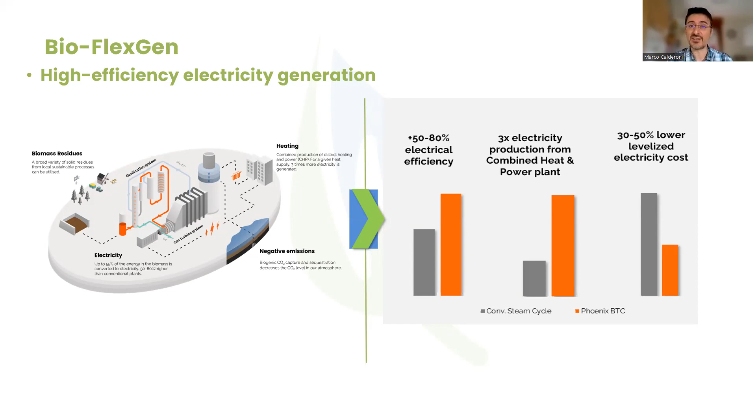Thank you, Juan. Congratulations for being short enough and precise. So the next project to be presented is HYPERGRYD. HYPERGRYD is, by the way, the project leading the organization of the workshop, whereas REWARDHeat is leading the issuing of the policy paper. So David Perez from ARC BCN in Barcelona, please, the floor is yours.

Thank you, Marco, for the introduction. I will try to be as quick as possible. My name is David Perez. I'm a senior project manager at ARC BCN, an engineering company in Barcelona, Spain. So what is HYPERGRYD? HYPERGRYD is hybrid coupled networks for thermal electric integrated smart energy districts.

What is our main goal in this project? Our main goal is to advance the state-of-the-art of district heating networks from the third generation to fourth and fifth generation district heating networks, and of course, the integration of all these networks to the rest of the energy vectors in the system. We are a project that started in October 2021 and will be finished next March.

We are around 19 partners from 7 different countries, in which we have 4 living labs - that is how we call the demos or projects. Our living labs are in Keso in Poland, in Sonnenplatz in Austria, in MB Park in Torino, and in Bolzano, Italy.

So what is a little bit about HYPERGRYD? We are developing a system that develops both hardware and software technologies in a way that we have the whole value chain of the process development of a district heating network. In this case, we study from renewable energy sources, thermal energy storage, cogeneration from other energy vectors like gas, electricity,

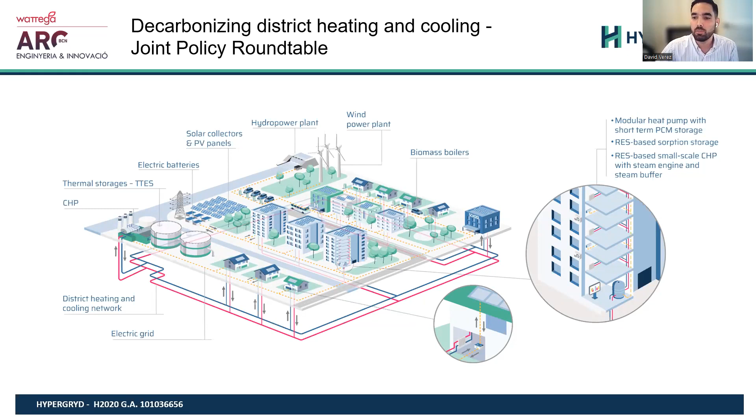or thermal. And we work with biomass boilers, with power plants, and so on. In the project, we developed 3 core technologies: one based on coupling a modular heat pump with short-term PCM storage, a thermochemical storage based on sorption technology, and a small-scale CHP for the operation of the district heating.

Software-wise, we try to cover the whole value chain of a district heating system. So we go from tools for designing the district itself to simulation and operation through a digital twin of the district heating, in a way that we can optimize the operational parameters from a techno-economic point of view. In short, this is the idea of the HYPERGRYD project.

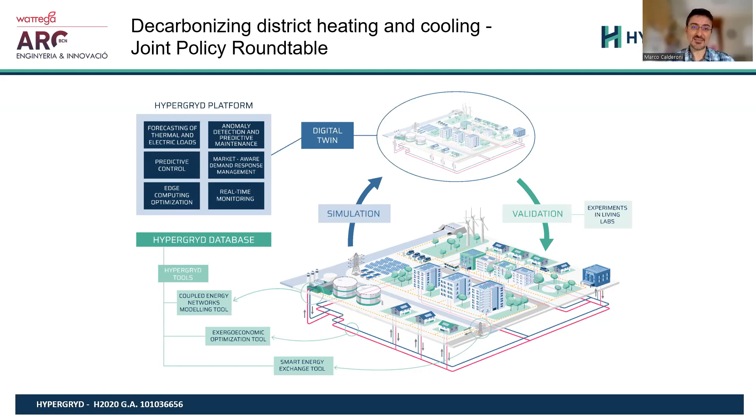So just quickly about the challenge. As you know, 50% of the energy demand in the European Union is for heating and cooling, and around 70% of the European population lives in cities. However, these cities are still energy inefficient, and there's a lot of waste heat being rejected into the atmosphere, which could cover quite a big chunk of this energy demand in Europe. This is where REWARDHeat comes into the game.

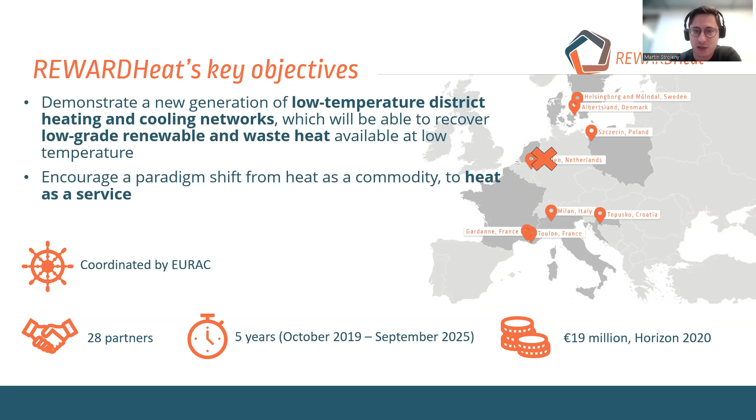Basically, what we try to do in REWARDHeat is to demonstrate a new generation of low temperature district heating and cooling networks, which can recover the waste heat available in urban areas. We also try to encourage a shift from heat as a commodity to heat as a service. We have 8 different demo sites spread around Europe.

Now just quickly about the main results of the project. First, we will demonstrate cost-effective solutions for district heating systems which can cover their demand using waste heat and renewable sources. We are also looking into assessment and characterization methods for waste heat and renewables at urban level, integrating successfully multiple urban excess heat and renewable heat sources. We also develop innovative technologies, including heat pumps, excess heat recovery technologies, and thermal storage in the networks.

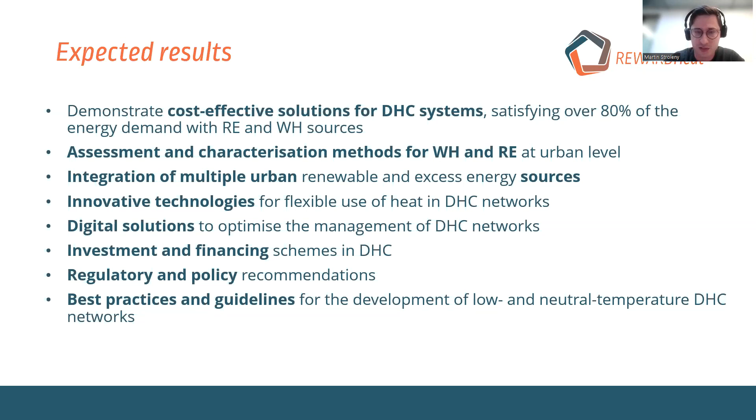We are also looking into digital solutions to optimize the management of these networks. On the softer side, we are investigating new financing and investment schemes in district heating and cooling, and finally working on regulation and policy recommendations, which is also the objective of this webinar. That would be all from my side.

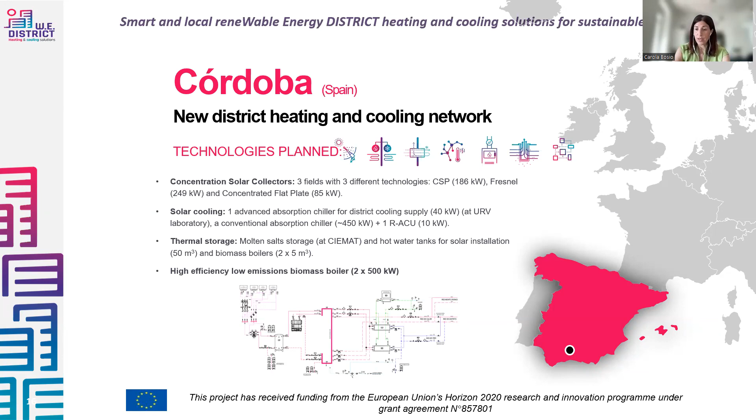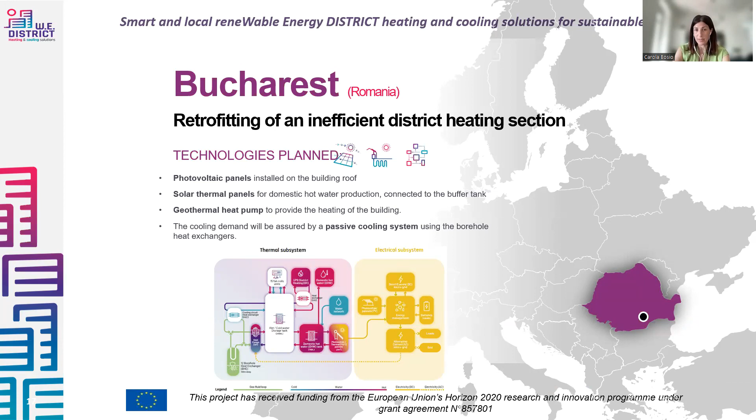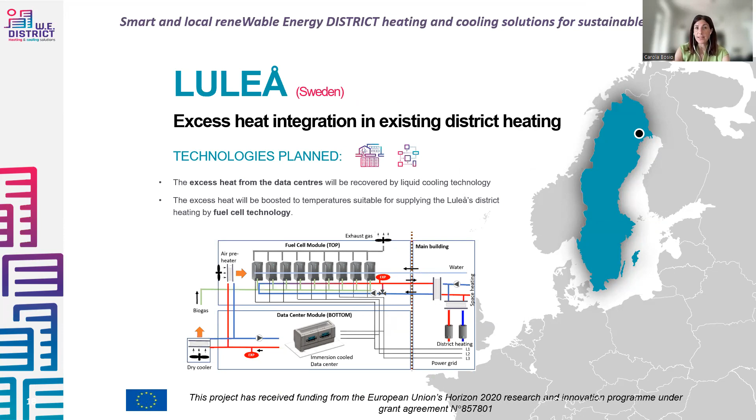The third demo site was in Luleå, Sweden, where the concept focuses on the recovery of waste heat from existing data centers at the university. The very innovative factor in this demo site is the use of fuel cell technologies fed by biogas. The last result of WEDISTRICT, which will remain available on our website, is a tool.

It's a platform where every kind of user can simulate the integration of different renewable energy technologies to feed district heating and cooling networks. The platform gives as an output a set of performance indicators to demonstrate the running of the system you configured. Thanks a lot for the attention.

Thank you, Carola. I think REWARDHeat and WEDISTRICT are about to close right after summer, so those are the two projects with more mature results.

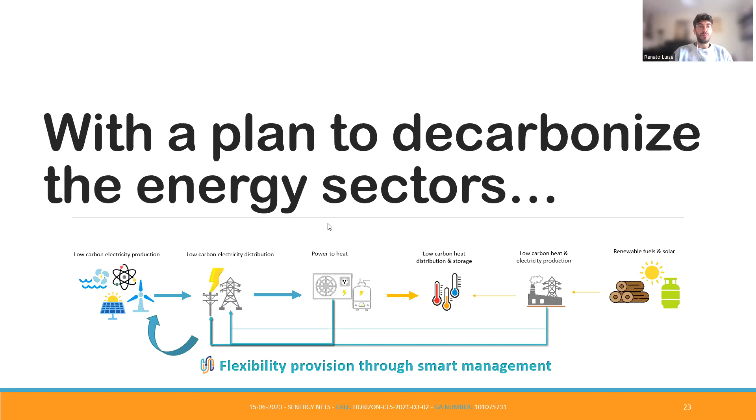Of course there are different ways, but the two main pillars we are focusing on are: first, to enhance the amount of renewable energy sources we use for satisfying heat demand through district heating and cooling distribution. Second, thanks to enhanced flexibility, to increase the energy efficiency of the system through this modeling, and also thanks to newer technologies, to decrease the energy demand.

As you can see in the consortium, we are 19 partners spread across around 8 European countries, which gives us a good overlook of different policies and frameworks, and through modeling it is possible to model different situations with different inputs. Another added value of this project is the presence of 2 DSOs in the consortium: Elektro Ljubljana and Unareti in Italy. On top of that, we have Enedis, a French DSO, in our advisory board.

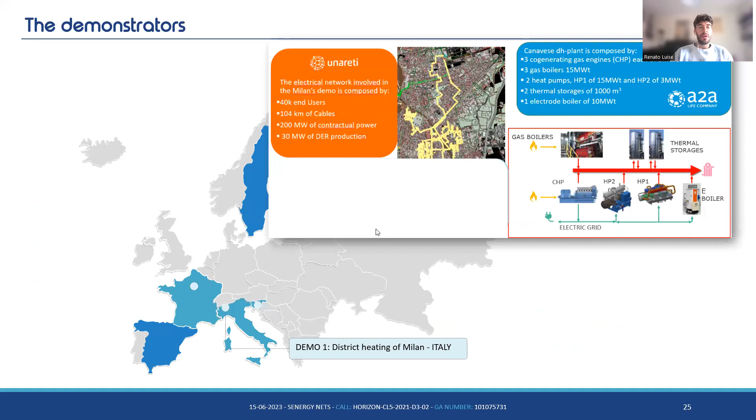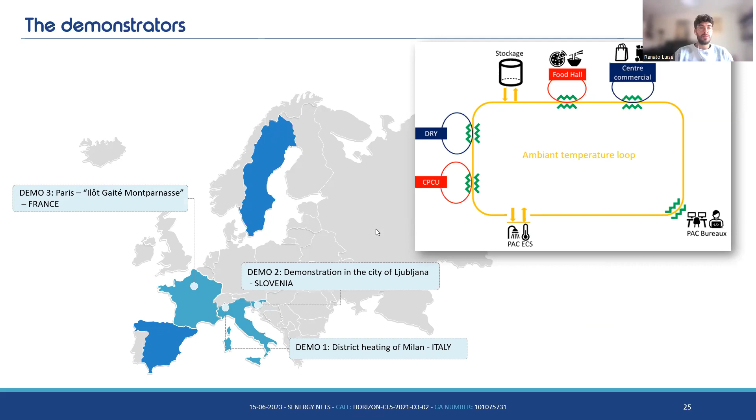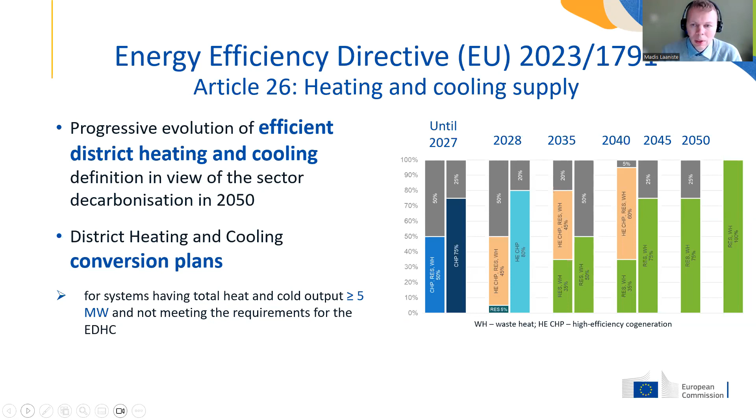When it comes to the Renewable Energy Directive, there is an overall target adopted for the district heating and cooling sector that has an indicative nature on how the role of renewable energy should increase in district heating and cooling. This is something for member states to consider in developing this particular area.

And there is also a requirement for mandatory cooperation between district heating and cooling system operators and electricity distribution system operators to ensure that the flexibility potential of district heating and cooling systems is used for balancing the electricity market and using excess intermittent renewables in heat generation in the future.

So there should be more analysis made in this area by member states and market operators to ensure that we are maximizing the output of renewables in the energy markets, and that there's good system integration in place.

There are also requirements on mandatory information disclosure by district heating and cooling systems contained in the Renewable Energy Directive, and also requirements on how to ensure that the potential of waste heat and cold is maximized in district heating and cooling systems.

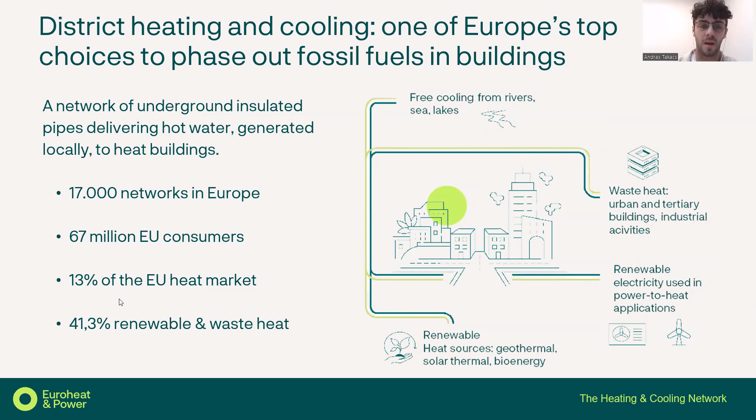Just to present you the current situation with district heating: in the district heating sector, we have 17,000 networks in Europe, which is a large number, serving 67 million EU consumers. And this covers 13% of the EU's heat market.

Recently, we published a study which mapped all the potential heat potential the district heating sector could use, and it proved that district heating could serve all the heat demand of Europe.

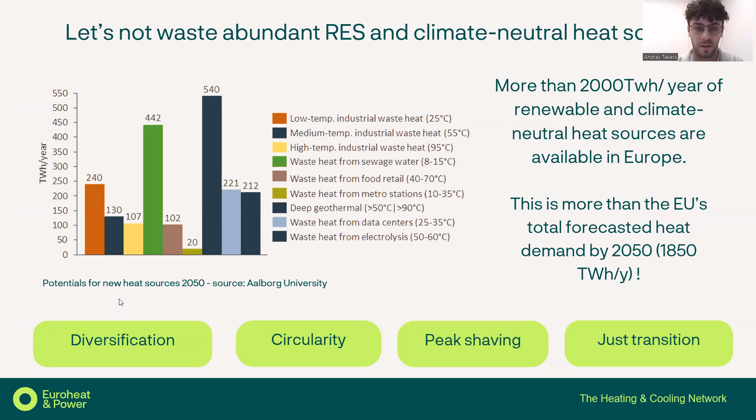You can see in this chart that the biggest potential lies in deep geothermal, but also in sewage water. And for example, from data centers as well, there's a huge potential.

We will need all of these energy sources because, according to our projections, the district heating sector will increase in the share of the heat market. By 2030, it could cover 20% of the European heat market. And by 2050, we foresee nearly half of the share.

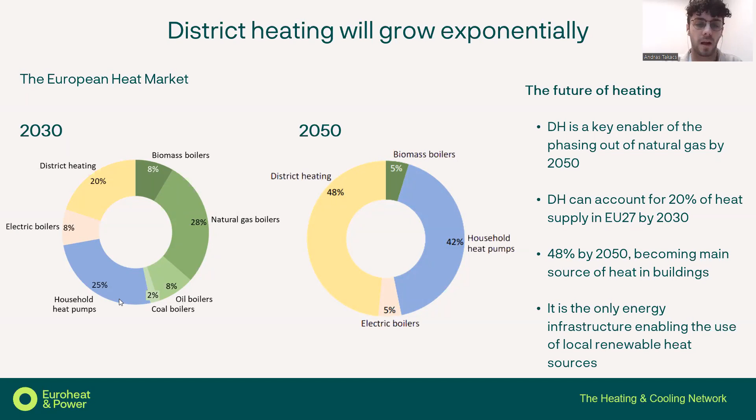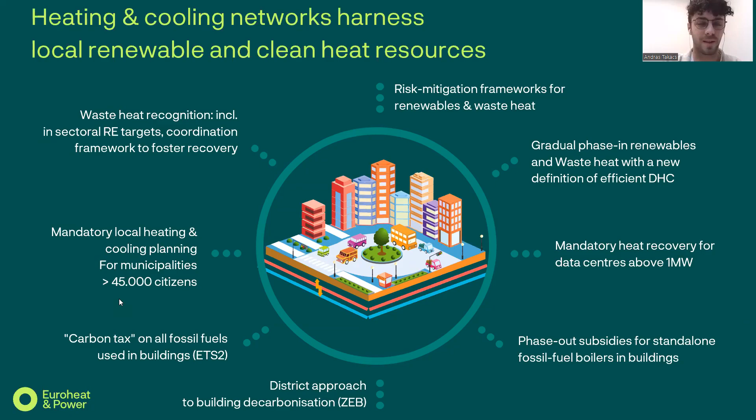Going to the policy part, I will try not to duplicate what Madis already covered, but I would like to highlight the importance of the local heating and cooling plans as well, because we see that this will be a huge push for our sector to develop further new networks.

As described, it will have to be developed by municipalities with at least 45,000 citizens, and it will map where is the potential for heat, what could be used locally, and where is the demand, and how this could be interconnected.

It's very promising, and as we saw on the map from Madis, Denmark and the Netherlands are doing already very well on national legislation on the local heating and cooling plans, but we have very good examples from Germany as well.

Where the draft local heating and cooling plan presents that the current heat market will shift from 62% natural gas and 27% district heating and some leftovers, to 56% district heating and 34% heat pumps. So that's a huge shift.

This is led by new legislation in Germany, which requires by mid-2028 that all of Germany's 11,000 municipalities make a heat plan above 10,000 inhabitants. So that's a much lower threshold than what the European Union set in the Energy Efficiency Directive.

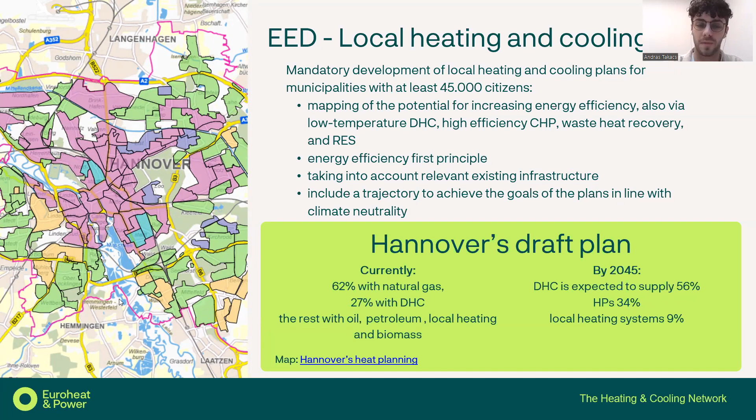We also see a very big advantage in Germany: the federal government decided to support the planning cost of the heat plans up to 2028 by 500 million euros. So the development of the plans will be also supported.

Then in the Energy Efficiency Directive, we see that many waste heat sources are supported to be used. For example, waste heat from data centers will have to be used if the data center exceeds the energy input of 1 megawatt.

And they have to make a technical assessment, economical assessment, if it's feasible or not. So that's already very positive, as we saw in our studies that the data center is a big potential for our sector to provide heat.

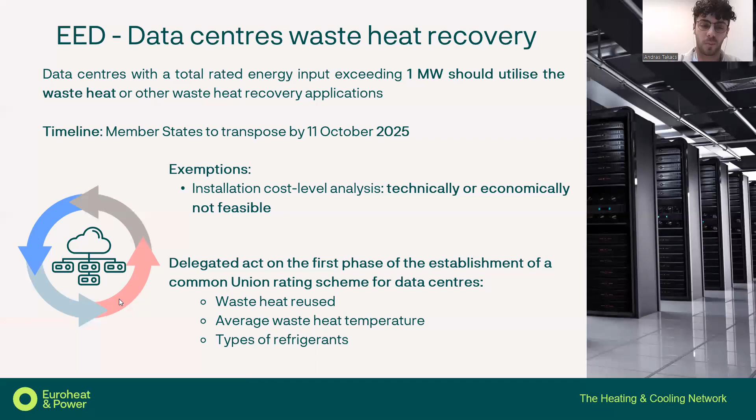And also other waste heat sources will be looked into. For example, thermal electricity generation installations - we will analyze also if their heat could be used.

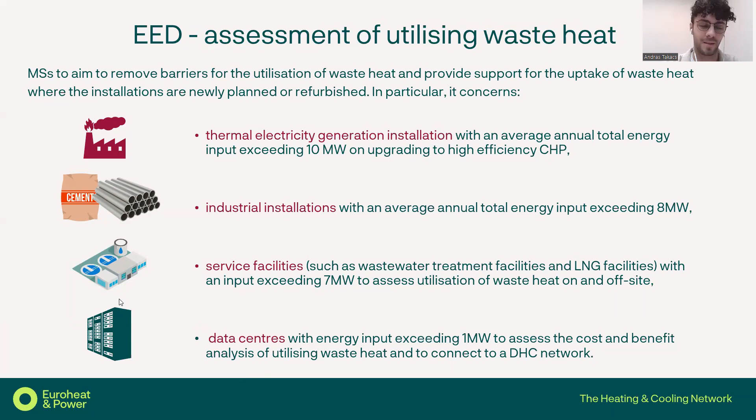Industrial installations exceeding a certain number of energy inputs, also service facilities like wastewater treatment plants, which I already mentioned, and the data centers as well. So in all of these different sectors, the waste heat potential will be looked into and mapped, to see how it could be harnessed and increase energy efficiency.

And talking about waste heat so much, we see that the RED Renewable Energy Directive also recognizes waste heat and counts it towards renewable energy targets in all of the targets, also for district heating and cooling, as was mentioned by Madis.

Then we have the efficient district heating and cooling definition, and here I just want to mention from the industry perspective that we are really glad we have this timeline of decarbonization, because in the sector we have a clear decarbonization pathway, and we know we can set up better investment plans in order to meet the definition.

According to the definition, after 2030 we cannot add any fossil fuel energy sources to efficient district heating and cooling networks. So we can implement renewable and waste heat sources only after 2030. And any district heating network which doesn't meet this definition will have to set up a plan for how to meet it.

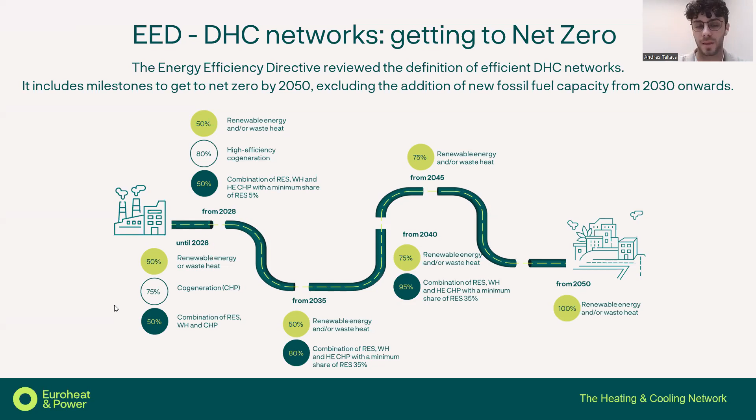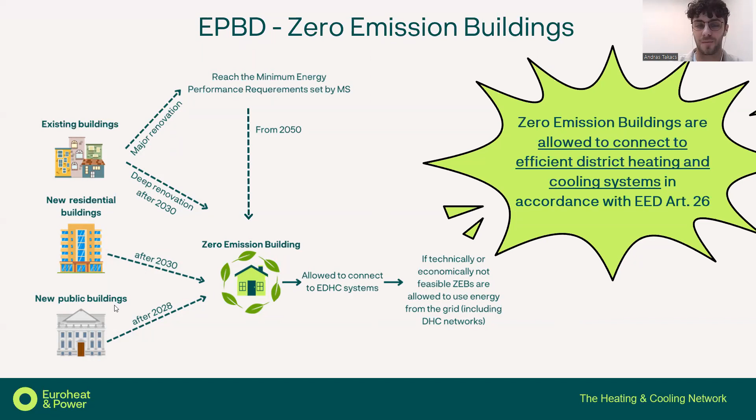And also in the Energy Performance of Buildings Directive, we see that after 2030, all new buildings have to be zero emission buildings, and the zero emission buildings are limited to connect only to efficient district heating and cooling systems. So district heating operators which aim to have new consumers after 2030 will have to meet the definition.

And we also see in the Energy Performance of Buildings Directive a phase out of financial incentives for individual boilers, which will also be a push for clean heat solutions.

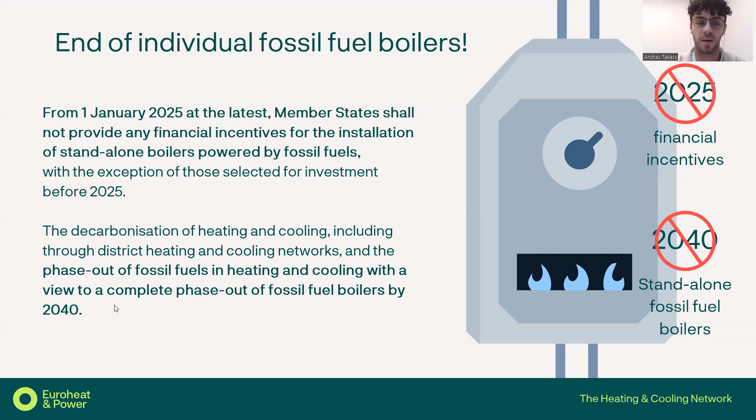And the last quick slide, to mention one more waste heat source: in the Urban Wastewater Treatment Directive, it was also introduced that wastewater plants serving a certain number of people will have to look into the recovery and use of waste heat, also on site, but also via district heating and cooling networks. So they will have to generate renewable energy as much as they use it.

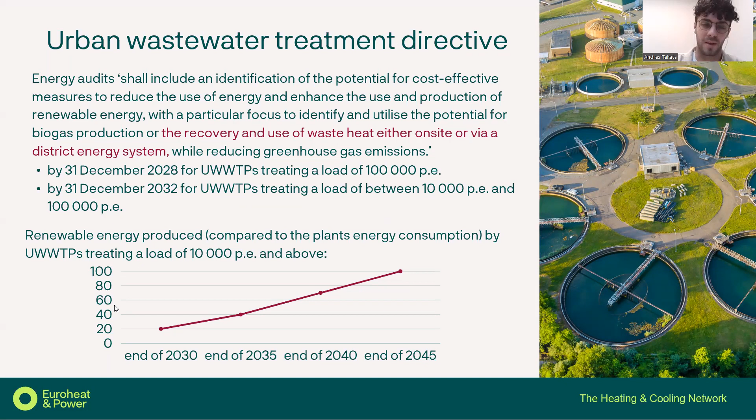Thank you very much, and I'm happy to answer the questions later.

Thank you, Andras, also perfectly on time. Thank you to all the speakers because it's really running as planned, which is not often the case. In the meantime, the audience started to ask some questions.

May I conclude, Andras, that the answer, or at least a partial answer, to the first question - where do the legal obligations to create local heating and cooling plants come from - comes basically from the Energy Efficiency Directive? Exactly, if I'm not mistaken, it's Article 25.

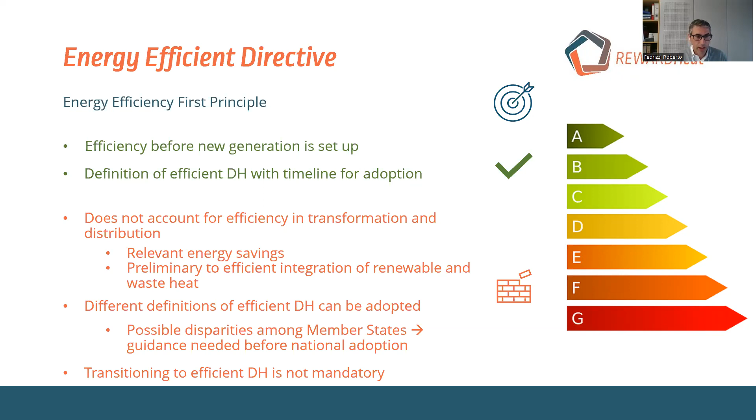Energy Efficiency Directive once more: here we really welcome the fact that waste heat is now treated on the same level as renewable heat, because we envisage in our project that there is huge potential for waste heat reuse in district heating.

We've already spoken this morning about data centers. They shall adopt heat recovery measures unless it is demonstrated it is not possible. Here again we see huge potential for district heating. However, we recognize that this is limited to large data centers, while small-sized data centers distributed in the urban context remain untouched by the directive. This should be taken into consideration, in our opinion.

We also saw this morning that the European Commission is working to guide this process. We see a real need to work on removing legal barriers to adopting waste heat in district heating. And foremost, it is needed that we work together, nationally and with district heating operators, to standardize contractual provisions, standardized contracts, and business models to integrate waste heat into district heating.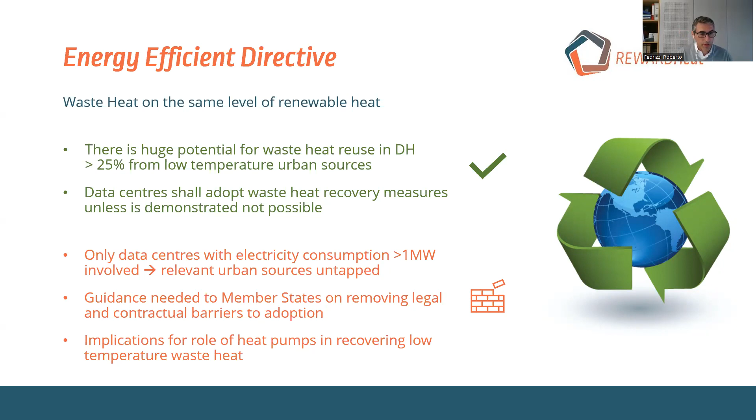If we talk about low temperature waste heat, we see significant implications for the role of heat pumps and therefore electrification in recovering waste heat for district heating. I don't want to go too much into this now, because I have a slide later on to talk about this topic.

To conclude on the Energy Efficiency Directive, once more we really welcome the local heating and cooling plan, mandatory for cities with more than 45,000 inhabitants, which are the vast majority in Europe. Again, we believe smaller municipalities should also be encouraged and helped in this process.

Where we see major work to go is the fact that the directive needs to be adopted at member state level, at national level, but implementation of the plan is a burden to the municipalities. So we see a challenge in addressing all the diverse contexts you can encounter in different urban areas, different cities and towns.

Again, with different situations in terms of renewable energy sources available and waste heat sources that you can find. Not to speak about different kinds of climates and therefore loads, if we want to go technical.

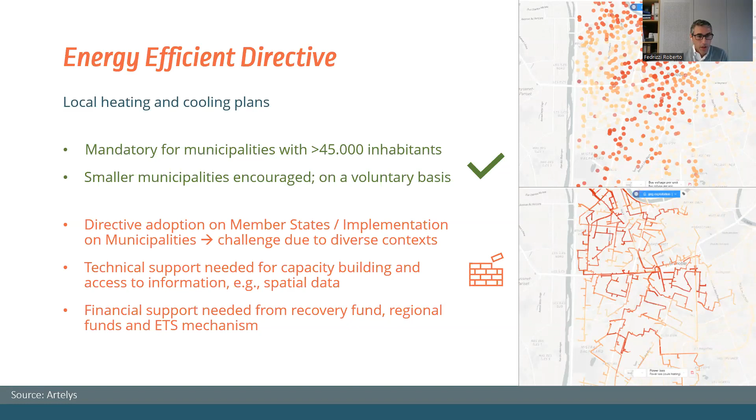Moving to the Renewable Energy Directive, we already heard about this from Andras. The directive's objective is to set binding targets for renewable sources integration in the energy system. For heating and cooling, you saw the targets I mentioned in green. What we see is that those targets need some more ambition, higher ambition, if we want to reach the binding overall 42% renewable energy penetration target in the heating sector by 2030.

Mathematically speaking, we understand the vast effort that is needed already to reach the 1% increase, and to increase again the rate to around 2 and 2.6%. That would be a huge effort, but at least national governments need to be made aware of the challenge and of the consequences of the decisions they are going to take.

As we have already seen today, we need to work on cooperation frameworks to de-risk waste heat and renewable energy integration in district heating and cooling, specifically waste heat, because waste heat is not there mandatorily, and one of the main challenges and fears for district heating operators is waste heat sources relocating. Once more, we also need financing mechanisms to accommodate energy prices for energy fluctuation.

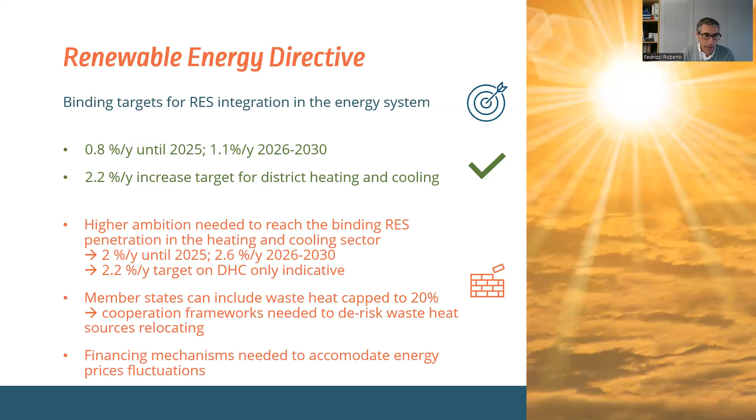As I said before, we see a large potential for sector coupling, mainly when we talk about waste heat integration in district heating and cooling applications, because via direct integration or by using heat pumps to integrate waste heat into district heating and cooling networks, we can somehow enable potential services to the electricity grid.

Here, obviously, we see challenges, which is that we need to go for more detailed and distributed management of energy sources in the network. So here we need to foster digitalization and artificial intelligence utilization in district heating, which is not really common as of today. And again, we see the role that thermal energy storage can play, which district heating networks can implement in the energy system.

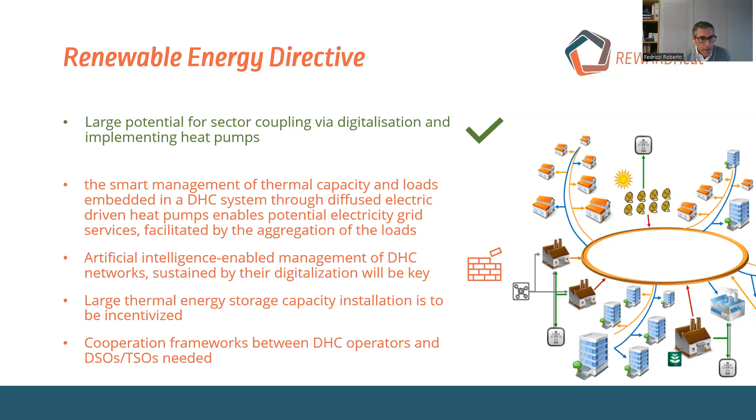We also recently analyzed the EPBD, because in the new recast there is more space for district heating. Again, EPBD is about renewable energy integration in the building stock, both newly built and retrofitted. So here we see an opening to district heating because the directive speaks more about RES integration, both on-site and nearby available.

So this opens quite a lot to connecting energy efficient district heating networks to buildings. And again, we see challenges in addressing energy performance certificates at national level, to reflect the integration of district heating and cooling networks in buildings on par with local generators.

And again, we welcome and highlight the need to address a district approach to building stock renovation, because this is the only way we see for maximizing district heating network adoption, and to plan the optimal utilization of waste and renewable heat already available in cities and towns.

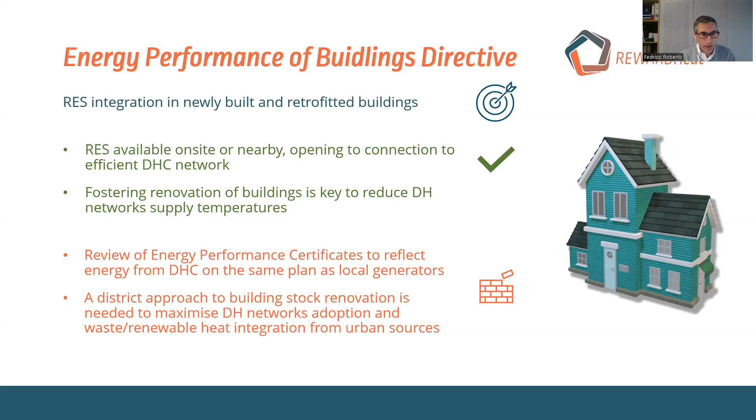Moving a little faster to the Emission Trading Directive, that is already a good effective tool to redistribute CO2 emission costs when we speak about ETS1. Hopefully ETS2, addressing individual heating systems, is going to be tackled or implemented soon. We see challenges here in the price cap set to 45 euros per ton of CO2 emitted by individual generators, as this might lead to unfair competition with large district heating networks.

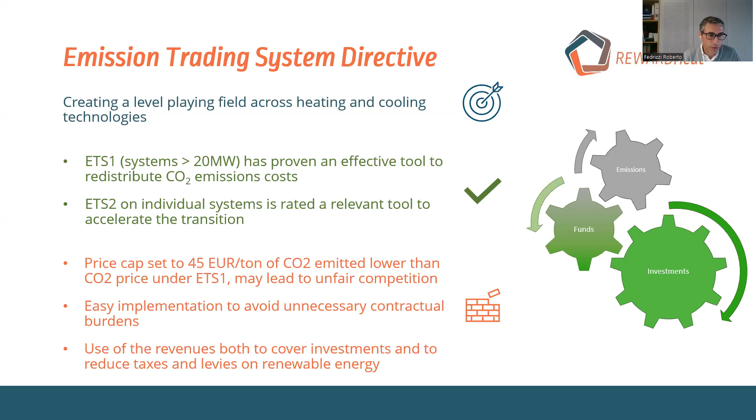We also see that if we want the directive to be accepted widely, we need an easy implementation of the regulation, and again we would foster using emission certificates not only to cover investments, but also to reduce taxes and fees on renewable energy. To conclude my presentation, we also analyzed the action plan on financing sustainable growth.

which is somehow a measure implemented next and complementary to the directives, to reorient capital flows, private and public, to sustainable growth. One key element of the plan is the EU taxonomy, that serves as a classification tool to classify if an investment and an implementation

can be classified as sustainable and green, and again establishes obligations when it comes to financing investments or facilitated investments. Indeed, one financial measure widely used by large district heating companies is green bonds, for example.

However, that is not a suitable financing solution for small size municipal operators, for example, that cannot afford to deliver a 50 million euro or larger green bond. Therefore, one possible solution we see is blended finance, in which public authorities guarantee facilitated or low-level grants that can de-risk the investment by private investors. Again, here we see a strong collaboration between public and private investors.

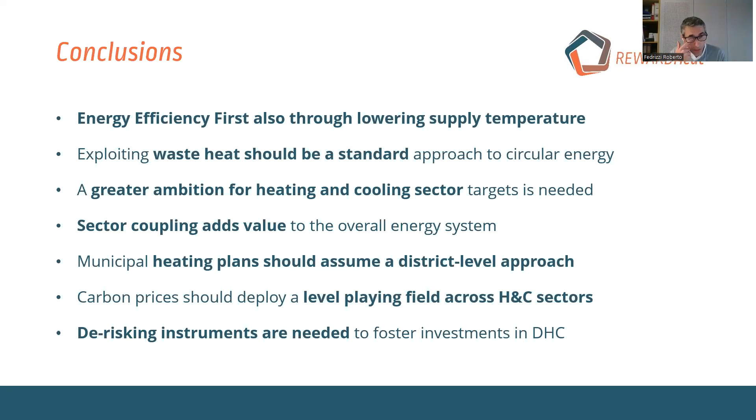And that really finishes my presentation. Marco, sorry for being a bit too long compared to what I was allowed. Hopefully, yeah, 5 minutes is acceptable. Don't worry, many topics indeed, and that's part of the game.

No, thanks, Roberto. First of all, I see we have still quite a high rate of participants, just a few left. That's a good sign. Thank you for staying.

Before we start with the roundtable, just a few notes I took during your presentation, Roberto. One is you mentioned the strong need for support to local authorities, local municipalities, for example, in local energy planning, as heating and cooling in particular, but I think that applies to energy planning in general.

Fully agree. One of the tools the European Commission is putting in place, as many of us know, is the LIFE program, where they have a specific financing sub-program on support to local authorities in energy planning. So, of course, this is not enough, but we need much more, but this is a nice starting point.

And then one question directly from my side. You mentioned that district heating utilities, if I understood correctly, will not necessarily need to move to efficient district heating. I'm not sure I understood, because I know, and you showed it, there is a mandatory binding target set in the Renewable Energy Directive that rules the yearly increase of efficiency of networks. So can you explain this once more, please?